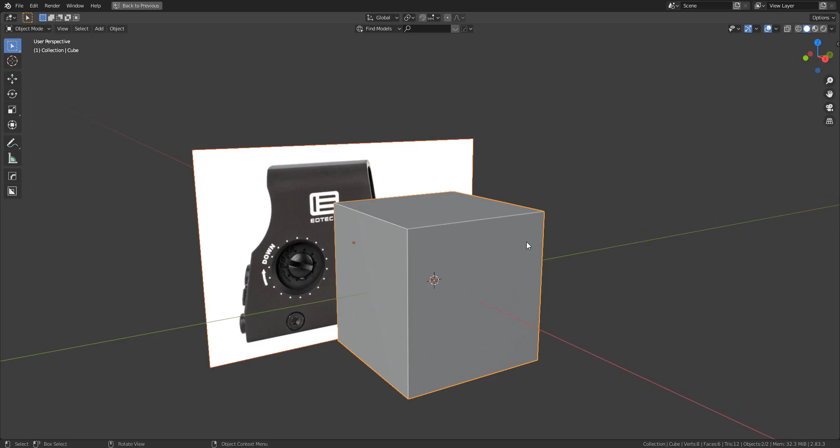I've already got a reference pulled up here, and we're going to get straight into it. We'll give this default cube a new home and get started on the model, using Boxcutter and Hard Ops today, since those are the best tools to use and it's something simple to add to future weapon designs or past projects. We'll get on with it and start with a cylinder here.

Now this sight we're modeling, the Eotech sight, I've had experience with before, and I really like using Eotech sights on my firearms. I can't recommend them any more than I already am, but I highly recommend using those if people have the available funds, because these sights are rather expensive, but it's well worth it. They retain zero, they're like tanks, it's hard to break them.

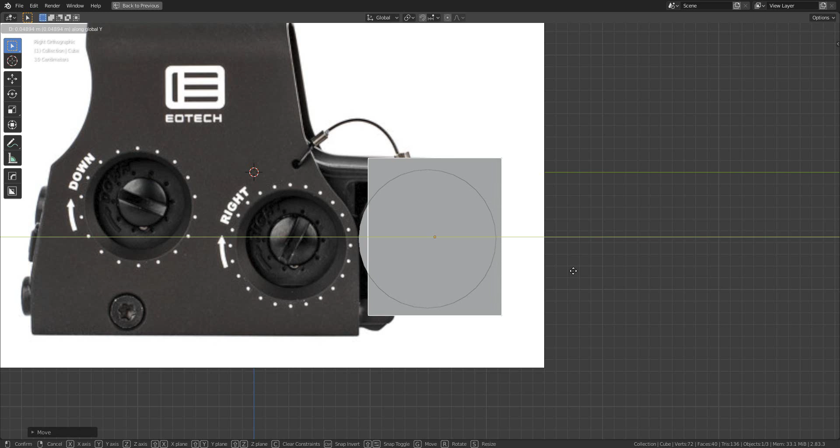So what we're doing here is building the outside curved shell for the battery housing. This particular model, I believe, takes a CR123A battery, a common military/law enforcement style battery. We're going to bring that here, and it kind of curves up on the inside. This outside shell is just like a metal protecting frame; on the inside it's made out of plastic and other parts, but it does curve up from the body here. We're going to try to replicate that now.

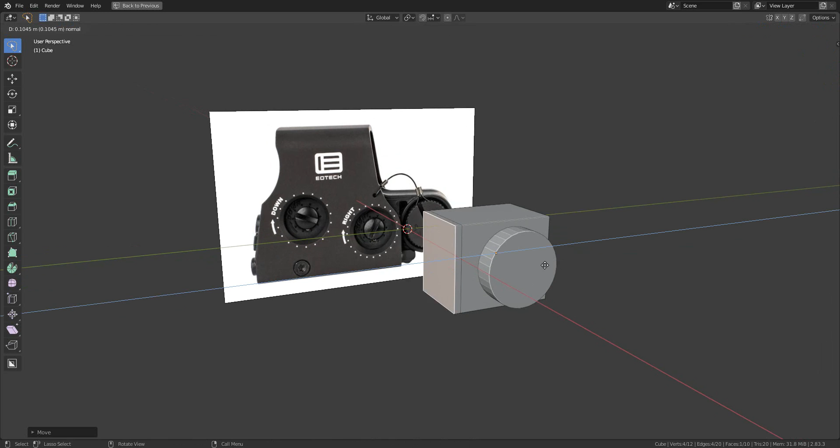I'm going to extrude that out, bring it to about where we need it on this side. Safe bet's about right here. And we're going to extrude that upwards to about right there, take our edge and move it. Same with this edge, it needs to be moved a little bit more over. And we can go ahead and get this beveled on - so we got a nice little bevel going here.

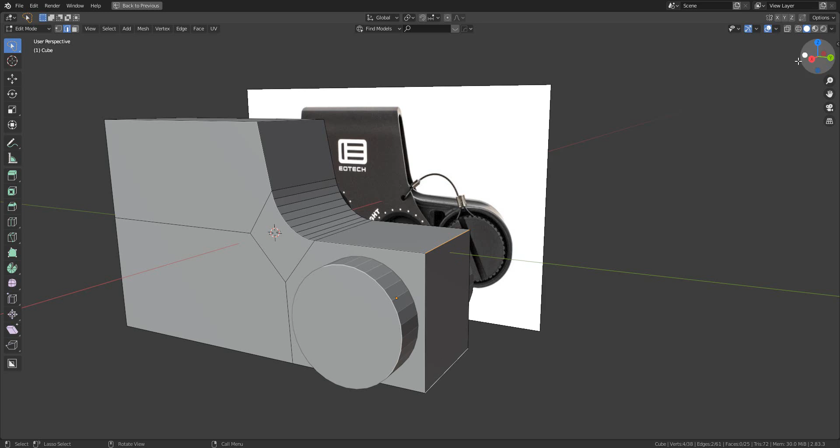Now what we're going to do is apply our scale, and bevel these edges here to try to match the profile of our cylinder. So now that's pretty well matched up, we're going to just stretch it out on the X a little bit, since it needs to be a little bit wider than what it was. Probably go with about right there.

So what we're going to do with this, we're going to C-sharpen it, bevel it, and we're going to union these two together with the Hard Ops union function. So that looks pretty good.

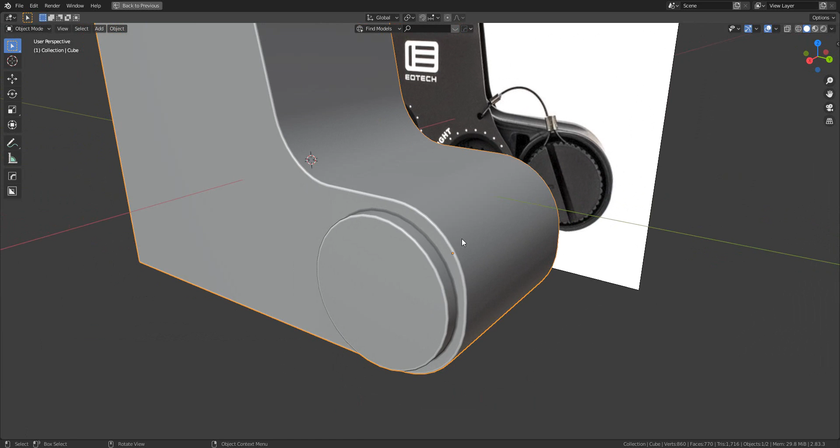I'm going to C-sharpen this again by holding Control when I click on Sharp after opening up the menu, and make sure it's looking pretty good, which in this case it is. Instead of that line supporting it, I'm going to give it this line to support it, and we'll remove that - that looks pretty good there.

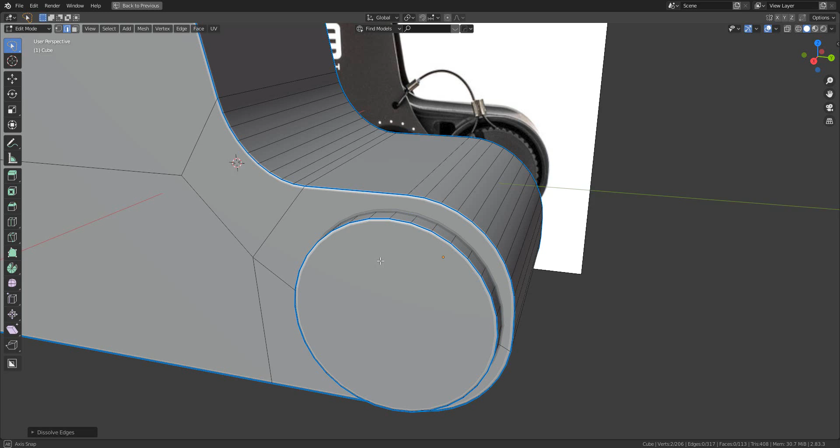We're going to take this edge here and this edge here - I promise I selected it - and we're going to bevel this. Go ahead and hit mark just to get rid of that, and grab this edge loop as well and make it a little bit smaller, on everything but the x-axis, so we don't have any overlapping bevels, because that's always not fun to deal with.

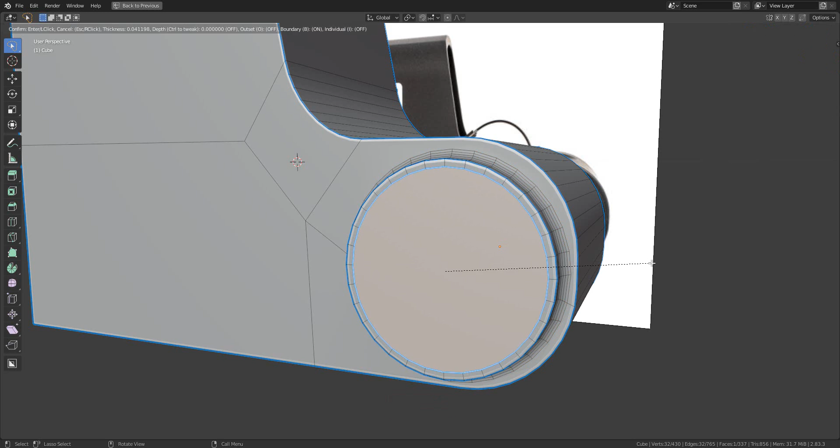So we got this basic shape going. Now we need to inset that, which is pretty easy to deal with. We're going to give it a mirror modifier, inset the face, and extrude it inwards. We'll revisit that for the battery cap here in just a moment.

Now the next step is to add a cutout after we bevel this top edge here. So we're going to go ahead and bevel that, make it look neat, nice and decent. Doesn't have to be anything crazy, we're just kind of eyeballing it right now - and that looks pretty good to me.

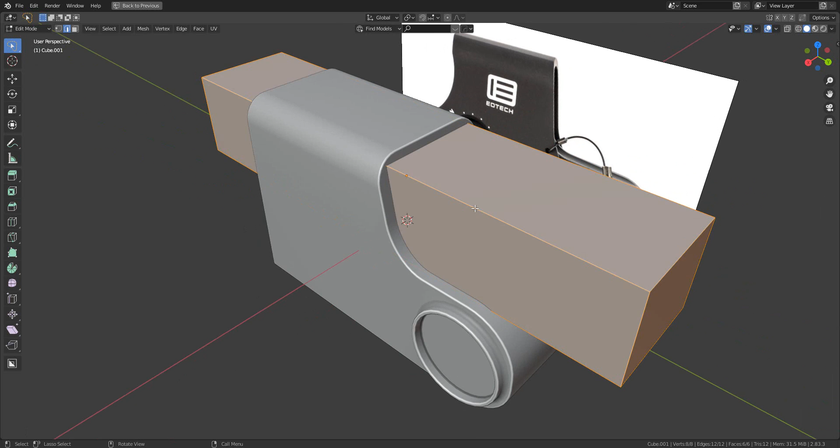So now, next step, we're going to get a cube, bring it like this, extrude it out, scale it up just to where there's a nice little gap on the top there, and extend it on the x-axis a little bit. Take all of our edges, apply the scale, and we're just going to bevel it to try to match the profile of the outside bevel.

We're going to go ahead and difference, and that's looking pretty good. Instead of doing that, what we can do is just bring this down a little bit here, difference, and that looks pretty good.

So we got a little bit of cleanup to do, which is no problem whatsoever. Just need to connect some lines here together, and we'll go ahead and move the outside bevel lines to the correct locations, and connect that there.

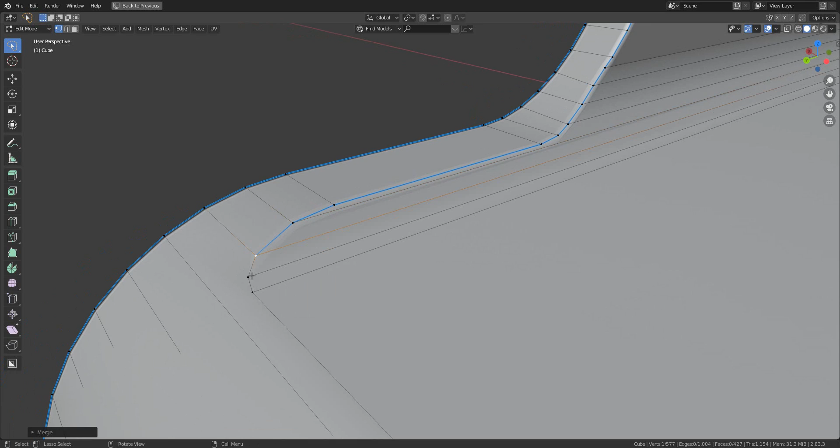Connect these here. And that's looking pretty good. It's about what we want it to look like. Now,

On the back side here, what we can do is we're going to try to get it to match the profile of this, because on the real ones they do match that profile. So first off, we're going to make sure our object is selected. We'll go into our orthographic view here.

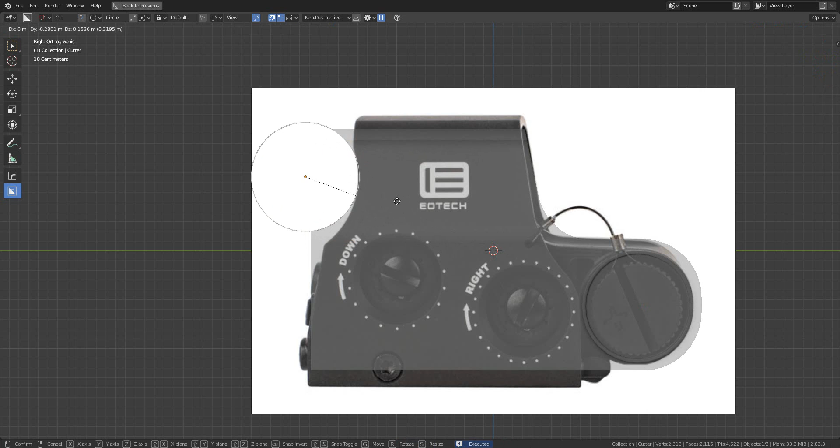Make sure I have Boxcutter selected, and we're going to go from view and do circle. We're just going to draw this circle in, punch it through, and we're going to move it in and manually adjust what this looks like. We're going to rotate that just a little bit, just to get it to kind of match that edge right there. So now that that's matching, we'll go ahead and hide that.

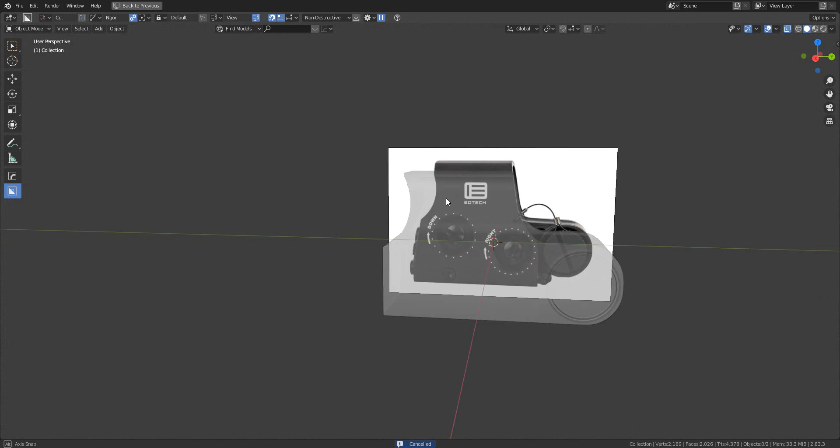We're going to choose our N-Gon tool. Make sure our object is selected again. Get our N-Gon tool. Chop off that edge. Chop off this edge here.

And we're looking good. We do have a few little issues here, but that's easy to fix, not a problem. Go ahead and join this line here. So it looks like we got a little bit of a situation here. We'll go ahead and turn our bevel off and see what we got going on, and it's just what I expected it to be. We'll go ahead and join that line there.

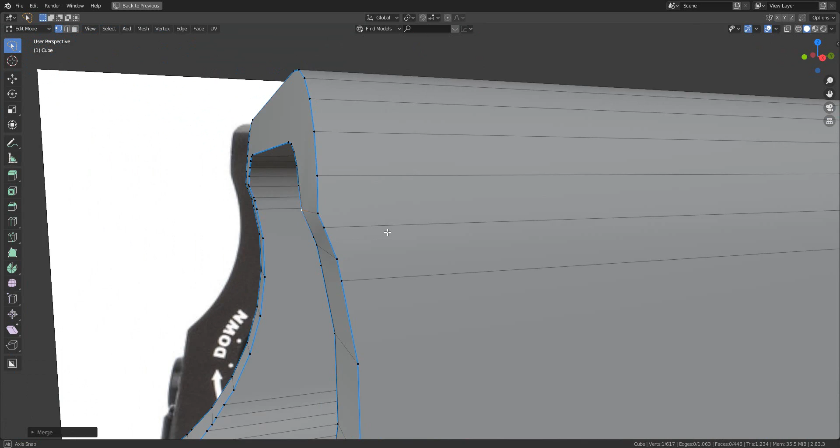Join this line here. And that's looking pretty good. What we can do here is I'm going to add an edge loop right there and just press J to join those together. And we will connect these. Move that up just a little bit.

And we're looking good so far. Make sure we're all nice and good looking over here. We don't want any issues. Connect that, and we're looking pretty good.

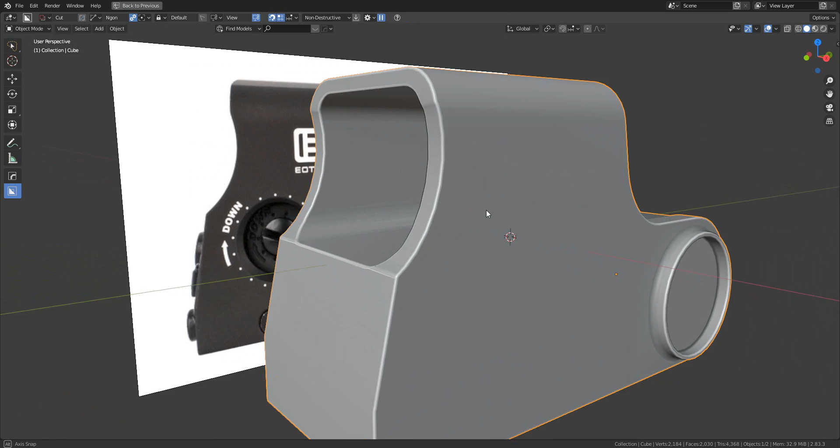So we'll go ahead and turn our bevel back on, and we'll see that it is looking good except for a little spot right here, and that's just where our bevel was being a little bit funky, but I double tap G to move that up a little bit, and we're looking pretty good.

So now that we've got this part added on, what we can do is add an edge loop right here, bevel that edge loop to where it gives us one more, and we're going to take these and pull them down. This is going to be the area that we're going to cut out for the sight to sit on the rail system.

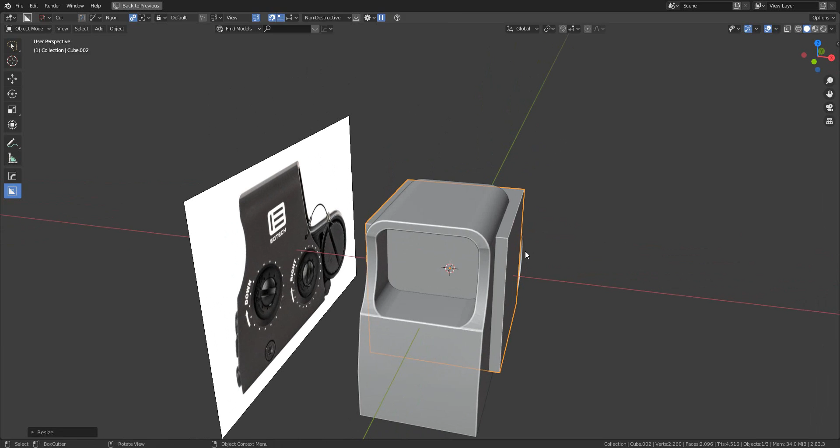So now that we've got that taken care of, we can add our outside shell. So what I like to do is just get a cube, get it about to the size we need it to be, down to there.

We're just going to do pretty much the same thing we did with the other one. We're going to apply the scale, take our two edges here, bevel it over just so it matches our profile on the inside. It doesn't have to be perfect.

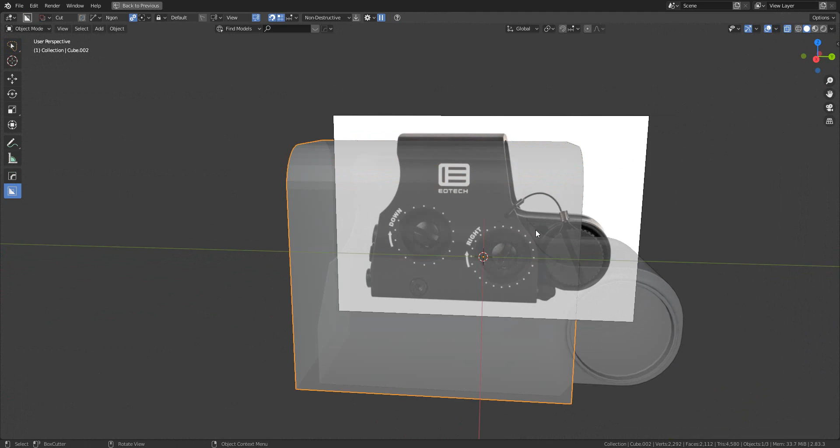It is a shell. We're going to go ahead and redo that bevel. I don't quite like how that looked. So that's much better. We're going to go with that one instead. So we've got our bevel for that.

I'm going to go ahead and C-sharpen it and bevel. I always get in the habit of C-sharpening even though it doesn't need it. You can just get away with sharpening it, but I get in the habit with C-sharpen because, like I've said in previous videos, I do stuff in a non-destructive/destructive type workflow where I get it the way I want it to be with the booleans, and then I make it permanent.

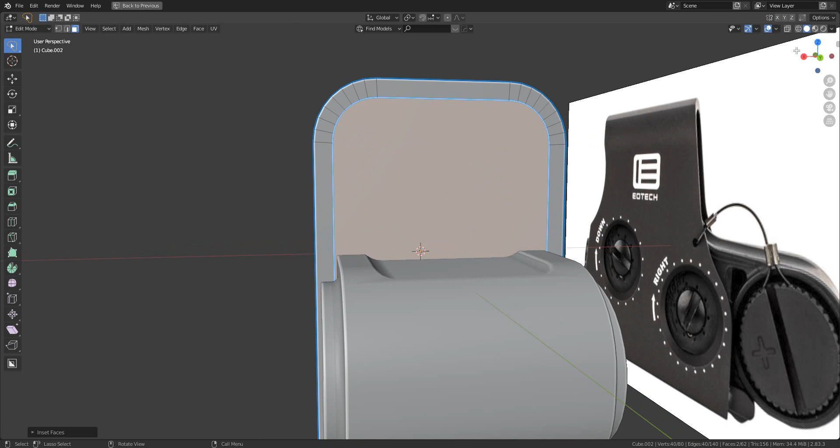So now that we have our shell selected, what we're going to do is we are going to bring our face down just a little bit. We're going to grab this face and that face, and we're going to inset it just so it matches the profile here. And so that wasn't a good inset, and we'll go ahead and do that again.

Go ahead and inset the faces just so we have a nice little shell. I'm going to scale it in just a little bit, and that's looking good. Now with the Loop Tools add-on, I'm going to go ahead and press Bridge, and that made that nice and hollow, which is exactly what we want.

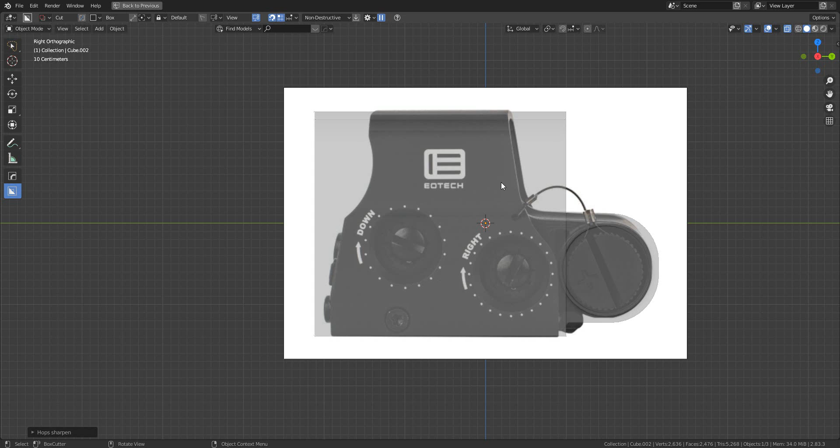Now what we're going to do, go ahead and select Box, drag it, and just chop off the bottom part, making life simple here. Now we're going to C-sharp it, go in, if I can press the right buttons here.

We're going to do pretty much the same thing with circle. Draw a circle, send it through, scale it on the Z, and rotate it.

Scale it on the Z a bit more, just so we're matching up nicely. In this case we are. We'll go ahead and hide that. Make sure this is selected again.

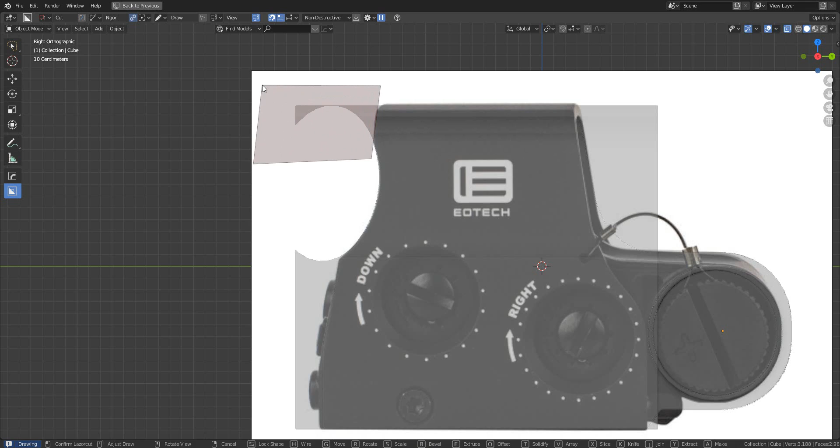Get our n-gon here. Chop that off, which wanted to be a bit goofy, so we're going to do that again. Chop this off. We're going to hold shift to keep it live just so we can see what's going on here. I'm not entirely sure what is going on here.

I see, so we're going to extend that out. This isn't working for whatever reason. It's because I'm chopping the wrong one. So we're going to go ahead and redo that.

Make sure our outside protector is selected. Go back into X-ray mode, and we're just going to attempt to do that again and pretend the last thing did not happen. So that's good.

Make sure our shell is selected again. Go ahead and draw an n-gon just to try to get us to match as much as we can here. Chop that off, and we're going to do the same for this here.

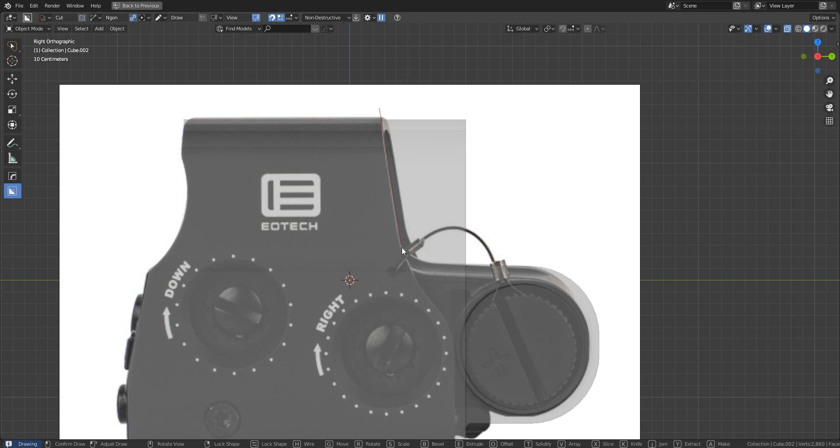Now this does start to get a slight curve, and that's perfectly fine. We're just going to follow that all the way down and out. Send that through there.

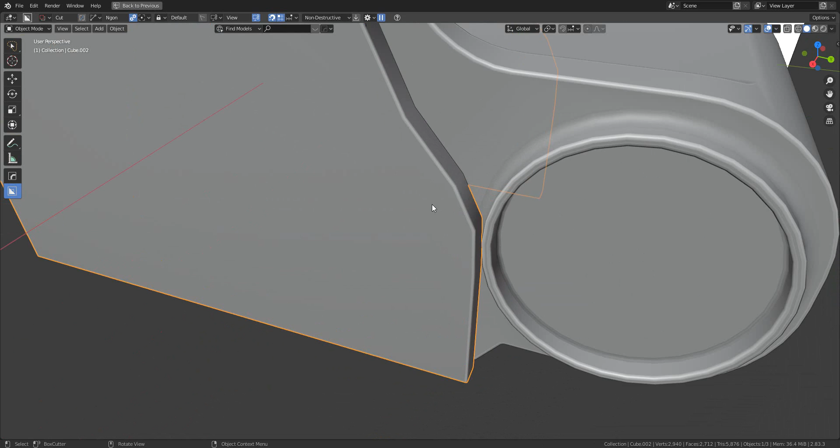Now, a cool thing is we can do this multiple different ways. We can C-sharpen it and go in and adjust those bevels manually, or the neat function we can do is go in here, get our last cutter, unhide it, and go into edit mode with our cutter.

Go ahead and grab those lines and bevel them inside the cutter itself. Same with these here. Go ahead and bevel those, hide it, and now we're looking really good.

This is starting to look like a regular sight, which is exactly what we want. So now I'm just going through looking at the topology here.

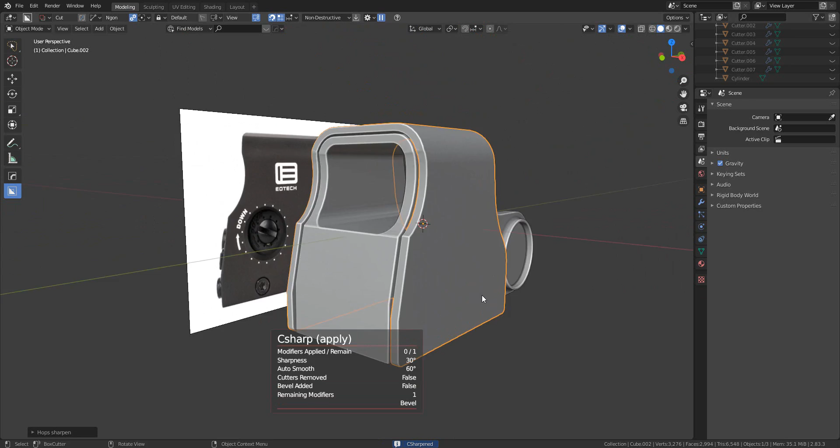I do want to take a little bit of creative liberty and bevel these edges here. I don't like how sharp those are, so we'll go ahead and add those, mark those edges, sharpen it again, and we're looking really good.

We've got kind of a sight system going on here. So now the next step is to get these holes cut out for our elevation and windage adjustment. These screws, you would screw them and it would move the reticle inside the dot to adjust for your elevation and your windage, just to zero in your weapon to make it shoot more accurately. So that's what we're going to do here now. Pretty simple.

Go into X-ray, make sure the outside shell is selected. Going to select circle, draw it to about the size it needs to be. Going to keep it live and move it into its final position here.

Since it's still live, what we're going to do is apply the weld modifier, add an array, offset the array to about right there. Now we're going to rotate it and offset it just a little bit more.

Perfect. And now if you'll notice on our picture here, it's kind of got a backwards bevel, which is fine, easy to fix, or easy to do rather.

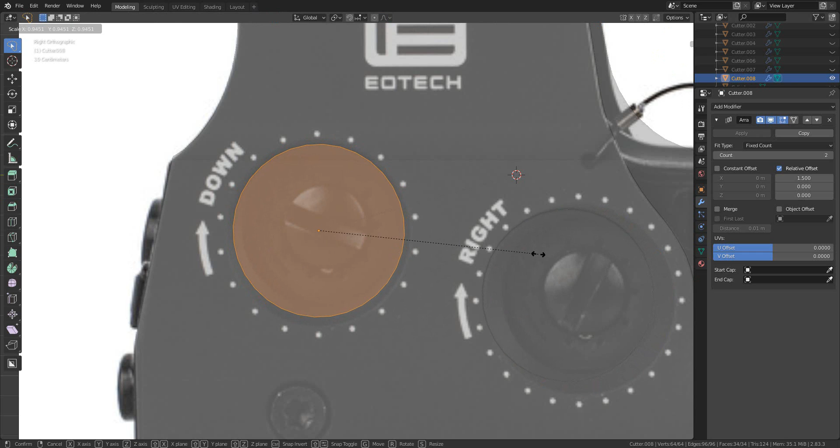So what we're going to do is move this just a little bit back to where it's supposed to be. Go into edit mode, select all, and just scale it down, and adjust our array modifier. So now that that's adjusted, what we can do, I know there's a million other ways to do this.

We're going to bring an edge loop to about right here. We're going to grab the outside edge loop and just scale it up a little bit. Before we do that, I'm going to go ahead and apply the array modifier, and we're going to do individual origins and just scale it up. And you can see what we're looking like here.

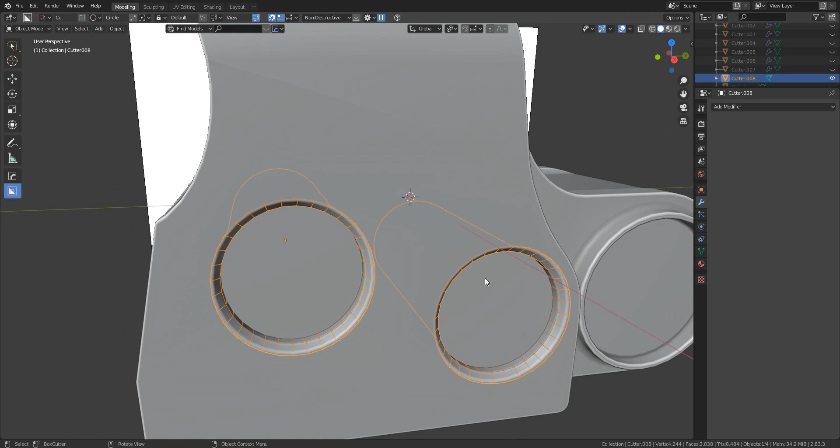So that looks pretty good to me. What we can do is go ahead and scale those up just a little bit more. Perfect. And we'll go ahead and hide that.

And we don't want this mirrored on the other side, because on the other side, that side is blank. There's really nothing there except for like a screw to go into mount onto the weapon. So we don't have to worry about that right now.

What we're going to do is bring our last cutter back. I'm going to snap cursor to selected. I'll hide that. Add in a cylinder.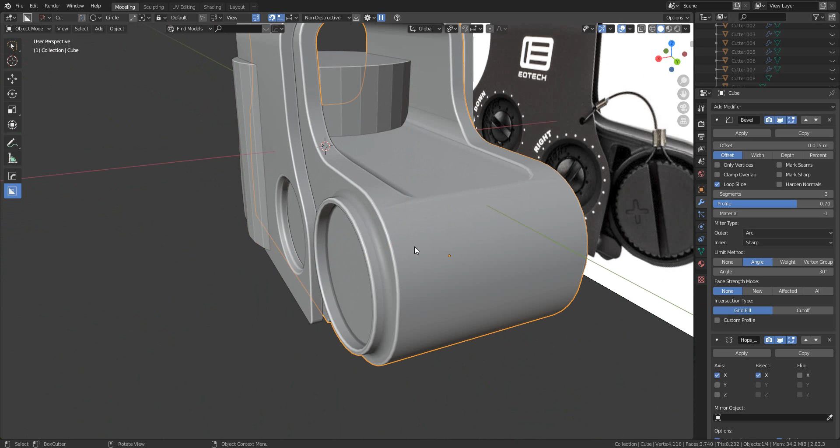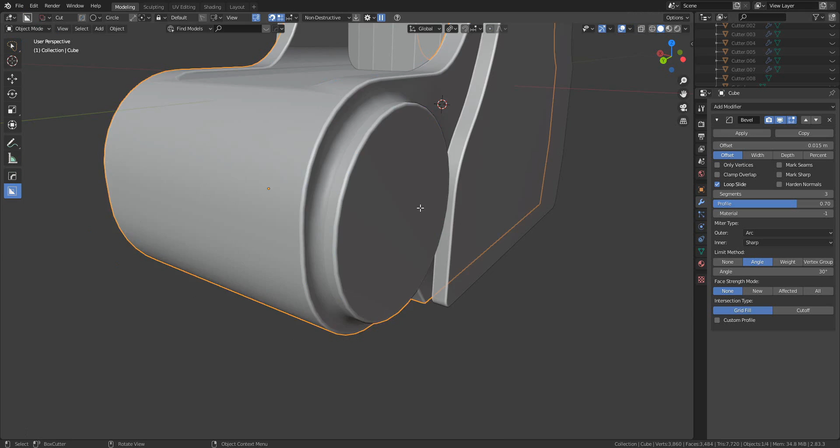What we're going to do with this is go ahead and apply our mirror here. And I'm going to bring this face, select the rest of it, delete it, select that edge, fill it in, and we're going to dissolve that edge because it's only a cap on one side.

Alright, going back to this, rotate on the Y, bring it over, just so we can kind of see what we're doing here. And the reference is off from my model just a little bit, but we're using this more as somewhat of a guide instead of an exact representation of the model itself. So we'll go ahead and do that.

Add an array modifier. Rotate it just about where we need it to be. And we're going to difference that, and that's where our screws are going to go into in just a moment.

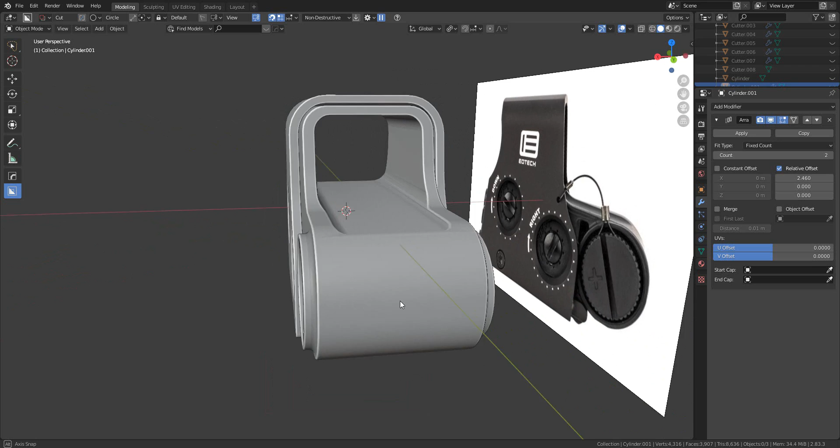Very cool, we're looking good so far. So now we're going to pay a little bit of attention on this side. There is a little plate that goes here. You're going to have your brightness adjustment and your power button on that as well. So we'll go ahead and start getting to modeling that plate.

So what I'm going to do is add a cube, scale it on the Y, bring it out just like so, bring it down right to the bottom, scale it on the X, and we'll go ahead and take this front face here. It's a little bit too thick, bring it in there, and we're going to extrude this all the way up till about right here, and push it forward to where it kind of matches the rest of the profile. It does have like a slight curve here.

So now that we've got that curve there, what we're going to do is add a loop cut in the middle. We're going to bevel that loop. I'm going to take these two loops here, bevel it again, and just take this face and push it down and over. That was too far down. We're going to push it down again and out. And instead of doing that, we're going to go ahead and go with good old-fashioned BoxCutter or HardOps.

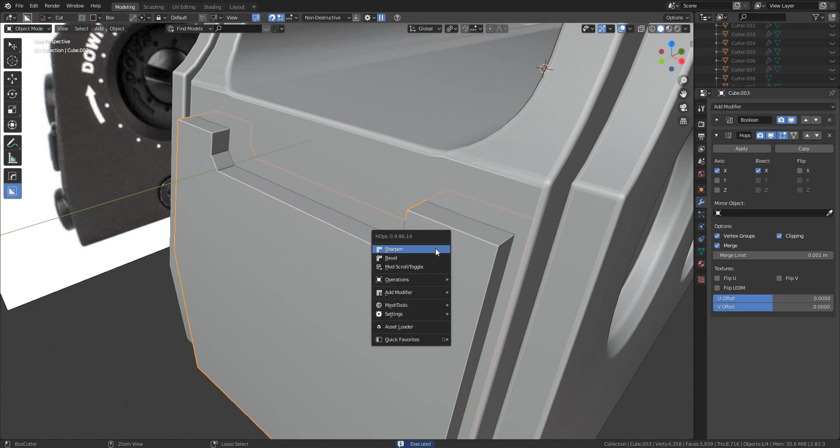Go in here with a box, draw it in. It's an ever so slight little cut, and that looks pretty good to me. So now we're going to sharpen this, bevel it, and we're going to take our top edges here and bevel those over. Mark it, and we're looking pretty good.

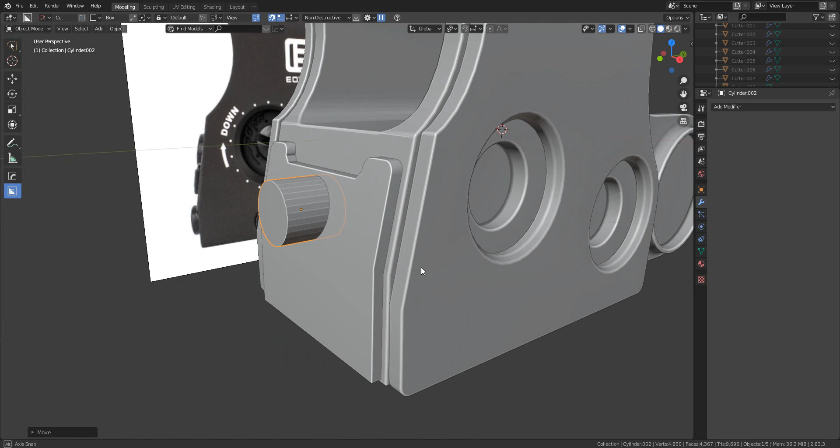So now that we've got that set up, the next step is what we can do is add our power button. And the cool thing about these sights, which is going to be fun to do here, is they have little raised protectors for the button, if you will. I don't know the exact name of what they would be called, but they're little protection type thing, like little raised edges where the button holes would be. So we're going to leave that there.

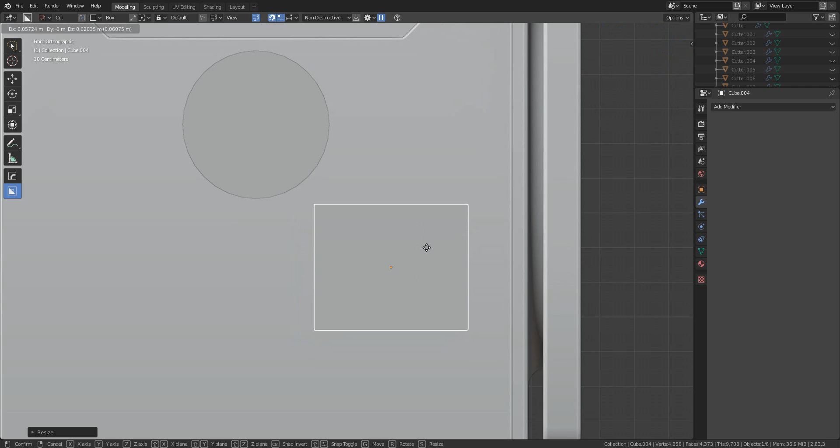Going to add a cube, bring that on the Y, just kind of get this to where we need it to be. These are kind of rectangular, and they will be about right here. Gives us some room for our screws and our cutouts on the bottom. So we're going to do that. Move that there. Make sure we have enough room and it's going through on both sides of our little plate here.

What I'm going to do is take these edges after I apply the scale, bevel them just enough. We're going to take these two and join them together, hold shift and click onto our plate, and we are going to do the knife. Very cool, that works for me.

Go ahead and hide these, and we're going to look and see what we have here. So that looks good to me. We're going to hold shift and press H to where it hides everything but this. Going to take our face here and here, inset it,

and we're going to use the Loop Tools bridge function. Same with these faces here. We're going to inset it and use the Loop Tools bridge function.

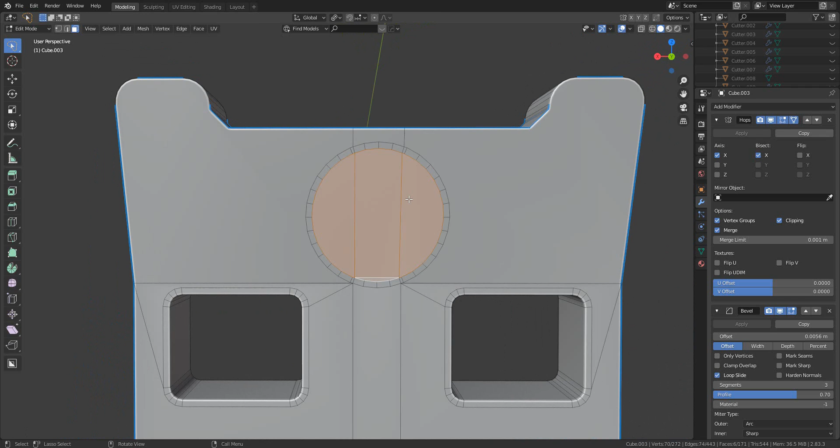So that gave us horrible geometry. We don't like that. We'll go ahead and apply our mirror and do that one more time. Sometimes mirror modifier will mess with some functions, and that's a lot better than our previous attempt.

So now what we're going to do is make sure our geometry is nice and happy looking here. We don't need any craziness going on, so what I'm going to do is just merge those two together. Do the same here, and we will do the same up here as well.

Looking good. We're going to go ahead and connect these two together by pressing J and get rid of these, which in turn allows me to get rid of this line, just to kind of clean up the topology a little bit. We don't want it looking disgusting. So that looks pretty nice.

Now what we can do is take this by holding Alt. We'll click on this edge right here, do the same for this, and the same for this. It didn't want to select all of that, and that's fine, so we will go in there and select it manually.

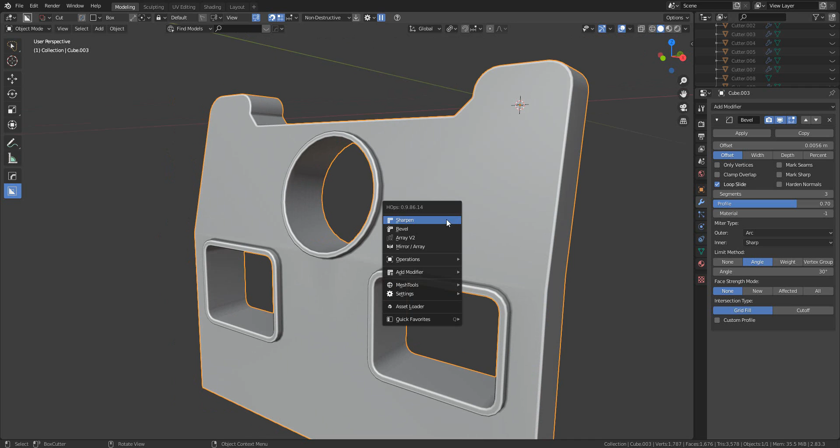Now what we're going to do is just extrude it outwards a little bit. Make sure it's still set on individual origins, because we want our circle here to be on the angle and not follow these angles here. So now that those are added, we'll go ahead and sharpen it and make sure our bevel's still looking good, which in this case our bevel is looking pretty good.

So we'll go ahead and press Alt H, unhide everything, go over here and hide the cutters again because we don't need those. Now we're looking pretty good.

So what we can do now is we will add a cylinder again, rotate it on the X, bring it straight down on the Z, make it about the right size, want it just ever so slightly smaller than the circle we just cut out, and we're going to bring it on through.

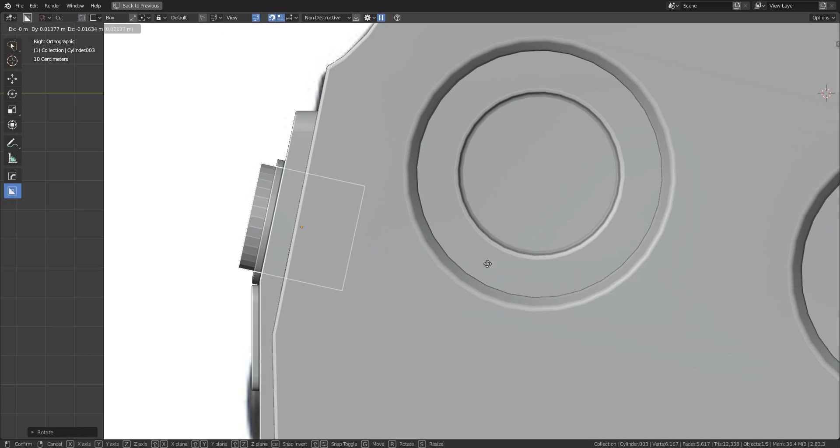With this one, we will rotate it to match our little angle we have here, just to put it in, make it look pretty nice. That looks pretty good to me, so we're going to move this back just a little bit, take our face and bevel it over. Slap it with a shade smooth, and we're cooking.

And what I'm going to do here is I'm going to go ahead and mirror modifier it again. I'm going to take this edge loop, duplicate it, make it its own selection, press A, extrude it along the Y. We're going to take this face, fill it, take that face and fill it, and we're going to select all and Shift N to recalculate the normals. We'll go ahead and shade smooth, and we're looking pretty good.

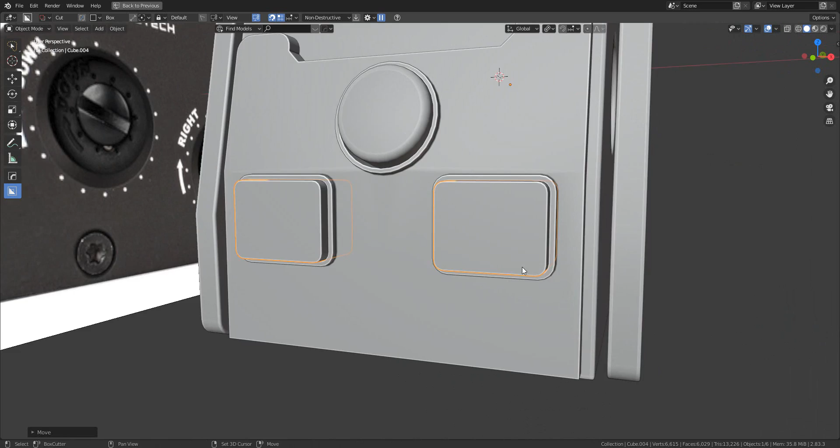So we'll go ahead and put those back where they belong. And we're going to take this face here and just bevel it over as well. Make sure to get off the sharp marks. So now we have our buttons in the back, and we're looking pretty good so far.

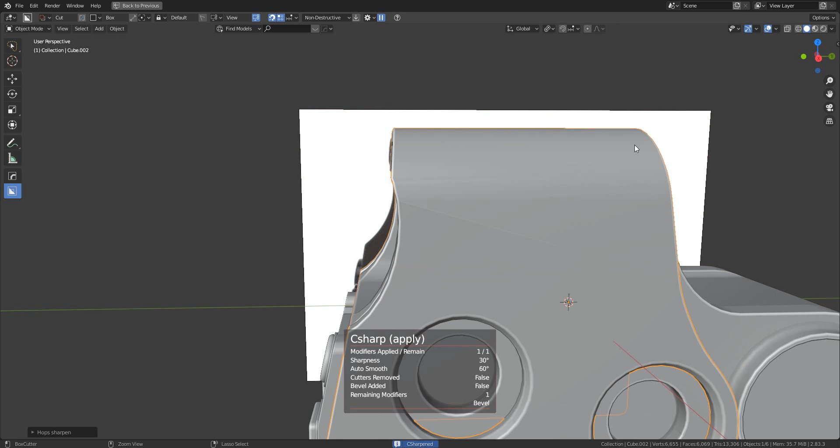Go ahead and handle our issues here, which that little line is the problem child. Go ahead and merge that, and it's doing the same thing on the other side, so we'll go ahead and fix it on the other side since we no longer have our mirror enabled. So now we're looking pretty good. We do have this little artifact here, but we can fix that relatively easily here in just a moment.

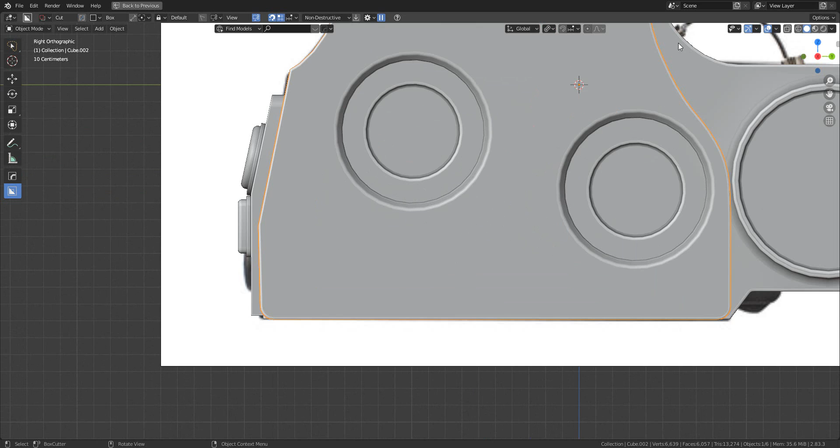So we're looking good. Now what we need to do is we're going to go ahead and put this screw in here, and it's going to go directly through onto the other side as well, and then on the other side there's going to be a bigger hand twist screw slash knob to where you can use your fingers or a pair of pliers to crank it down on that rail system. So we're going to make sure our outside shell is selected.

Go into X-ray mode, select circle, pick about the middle if we can, hold shift, send it through, and we're just going to move it down just a little bit. And we're looking pretty good so far. Inside there is where a screw will be going.

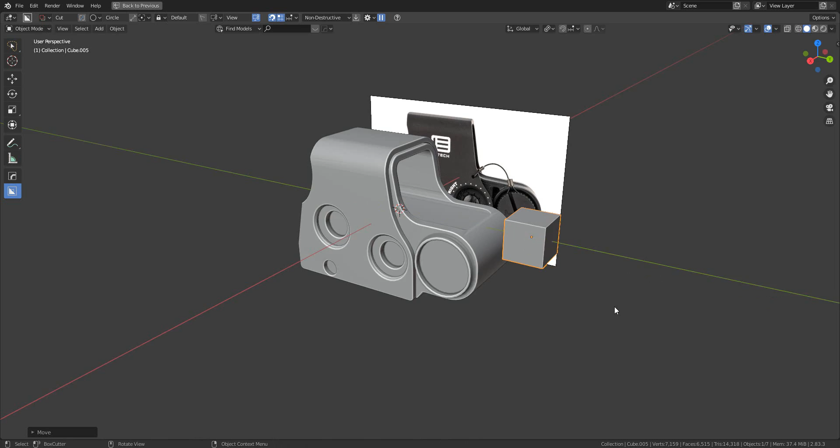So now we need to get our profile for the rail, and that will be pretty easy to do. So we'll go ahead and add a cube, bring it over, you want it just about there. You can be very precise with the measurements to make sure it fits onto a regular Picatinny rail system that most firearms either have or can have aftermarket accessories for. But I'm just going to eyeball it here because I kind of know about the right size. And the cool thing is we can always adjust the size of it later if we leave this active, or we can just go in and manually grab it and scale it if we need to.

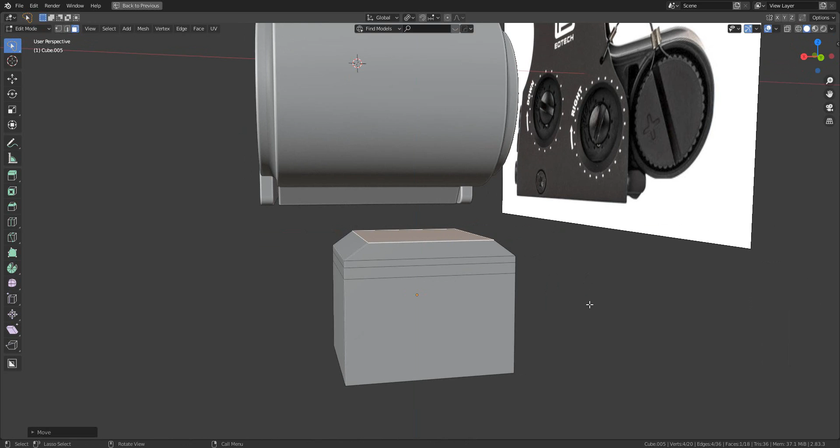So now what we're going to do, we're going to add a loop here, add a loop right underneath that, and add a loop right underneath that. We're going to take this top face here, scale it in on the x-axis, bring it down. I'm going to take this edge loop here, scale it in on the x-axis. Actually, we'll take the bottom one as well. Just so we have our little Picatinny rail type look going on here. So now that we have that taken care of, we will go ahead and extend it out on the Y.

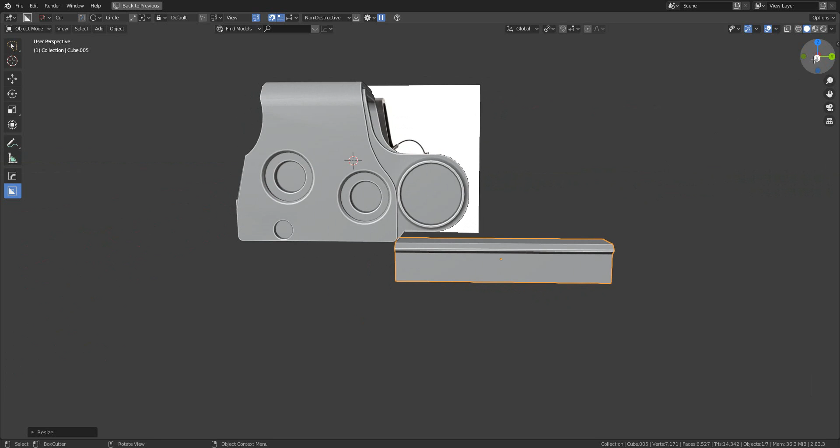And we'll go ahead and move it up into the weapon about like that. You want to have a little bit of meat grabbing onto the rail. So once that is in there, we'll go ahead and move it over. Make sure it goes all the way through. We're going to duplicate this.

So Shift D, go ahead and hit, just click. We'll go ahead and difference that. And we'll go ahead and difference the bottom piece. So that's looking pretty good. Go ahead and scale that just a little bit more.

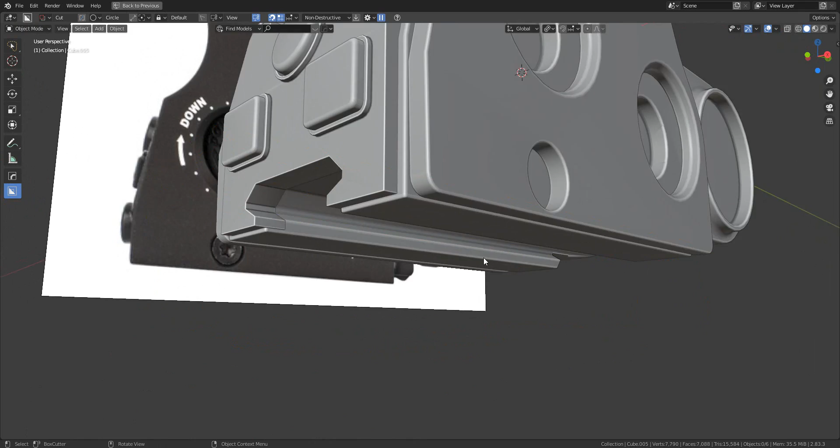Hide it. And we're looking really good here. So now what we can do is we can go ahead and C-sharpen it and see why our bevel is giving us a hard time here. And also clean up some of this junk down here.

So what we can do is go ahead and hide our bevel modifier so we can work with it a little bit better. I'm going to draw a knife cut to that there. Go ahead and move that up. Give us some more room to work with. And we'll do the same on the other side here.

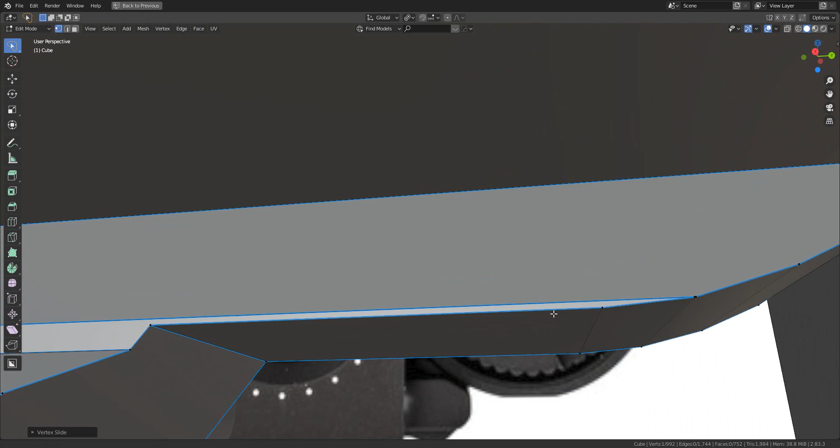Give us some more room, and we will merge those two together. Make sure it's not doing the same thing on this side here, which it happens to be doing that. So we'll go ahead and merge those together as well. And we will check back on this side. I'm just pressing period to jump over here so I don't have to move my mouse all over the place all day long. We're looking pretty good.

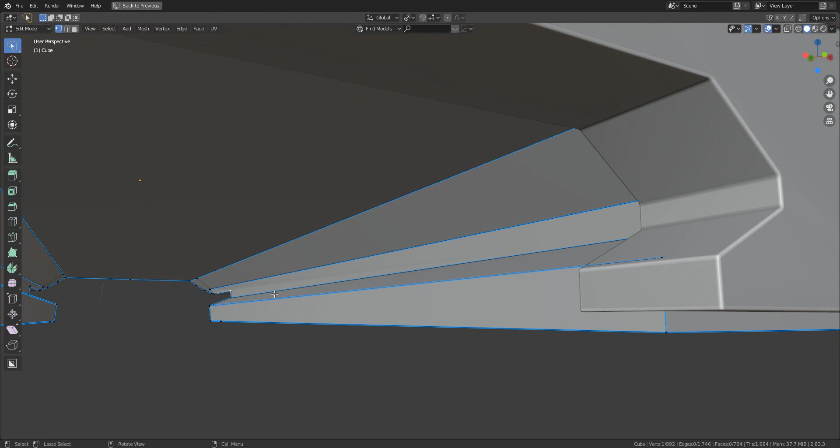No bevel overlap. We'll go ahead and take this bottom edge here on both sides and just push it down just to give that bevel a little bit more room to work with. And it looks like we got a little issue over here. This is looking good. I always like to check my knife just to make sure it actually went into the mesh properly, which in this case it looks like it has.

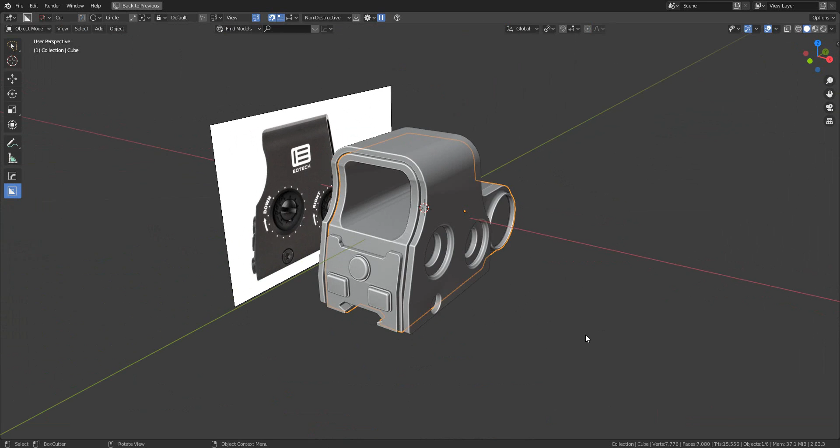So what we can do now is go ahead and turn our bevel back on. Bevel's still not too terribly happy, but we can deal with it. Doing that literally does nothing. But we're looking pretty good. What we can do is also just get rid of our bevel just a little bit, just take back a little bit what we gave it, because we're giving it too much and it's getting a little bit excited on us now, and we can't be having all that.

Now with this here, what we're going to do is just bevel over these edges here, mark them, and C-sharpen that. So now we're looking pretty good.

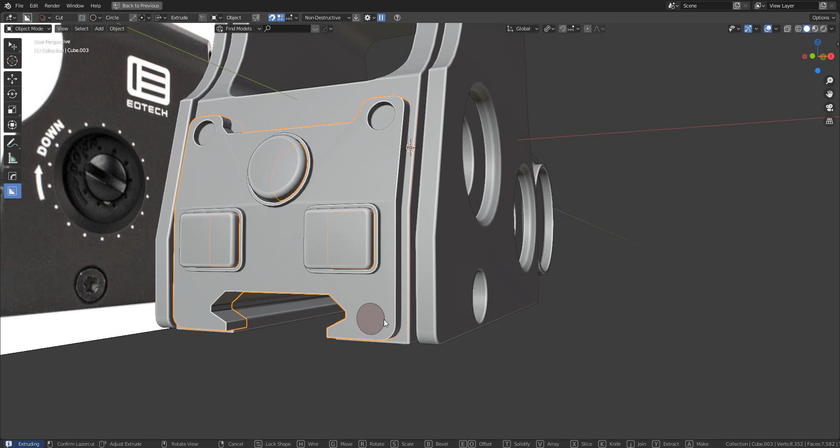We're going to make sure our mirror is still active, which it happens to be. I'll move it up there above the bevel. We're going to go with object this time, and we're going to draw a screw hole here and a screw hole right here. Just kind of eyeballing the shape. You don't have to be extremely precise.

So I'll go ahead and sharpen that. And we're going to go through and figure out why this is wanting to give us a little bit of issues. So we're just going to jump off a line there, jump a line there, and that fixed our issue. So we're looking pretty good so far.

Now what we can do is add our battery cap, and we'll go ahead and do that. I also want to go ahead and add this little hole for our retention wire here. I'll go ahead and send that through. It doesn't need to be through on both sides.

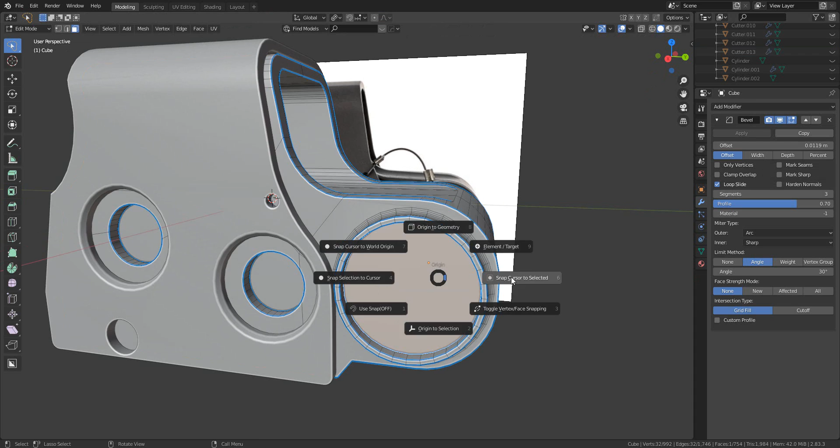I forgot to keep it live or just draw it normally, so I'm going to go ahead and pick that cutter back up and move it over. It got a little bit ahead of itself and too excited. So now what we're going to do is grab this face, snap cursor to selected.

Alright, now we're going to do our little battery cap here. So what I'm going to do is add a cylinder, change the verts up to 66, scale it down, rotate it on the Y, scale it in on the X, bring it over here. Looking pretty good so far.

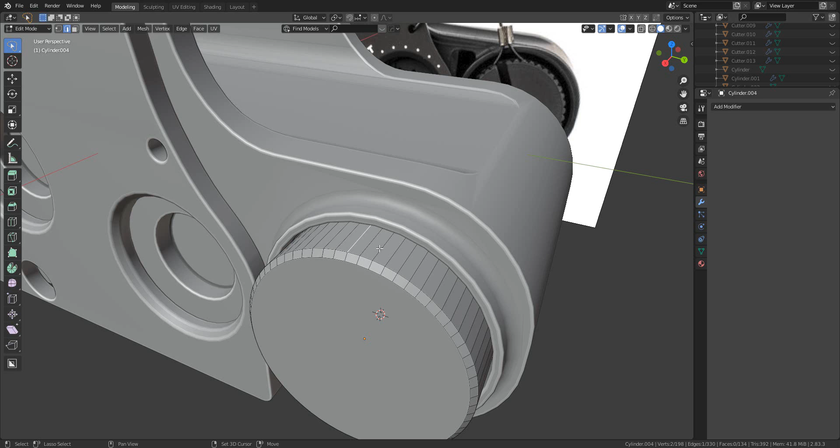Next step would be to bevel this edge after I apply the scale. It's got just a nice little chamfer going, nothing crazy. Very good. So now what we're going to do is select every other line. And this will take a minute, so I'll go ahead and speed it up.

Alright, cool. Now that we've got those lines selected, we'll go ahead and scale it on everything but the X, holding Shift and hitting X. Scale that inwards.

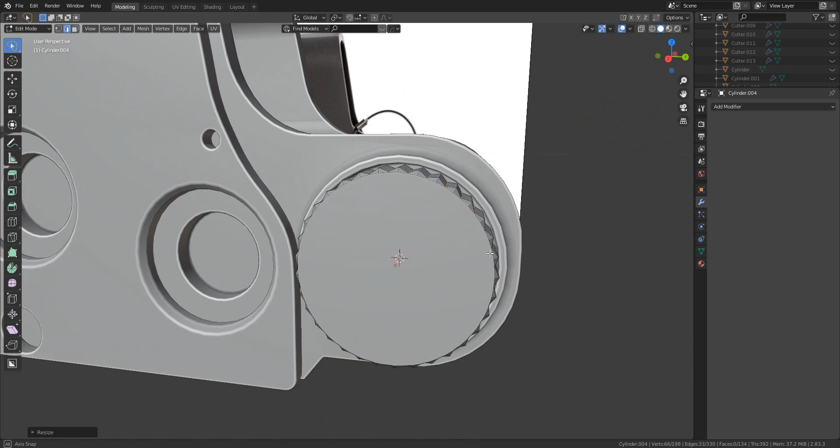That's looking pretty good to me. So we'll go ahead and look at it from this point of view here and scale it on everything but the X, so Shift X again, just so it's right there. We're looking pretty good, so I'll go ahead and sharpen that and put a nice little bevel on it.

So now we're cooking. I'll go ahead and scale this in just a little bit more here. Now we need to add our cut across, so that's going to be really simple. Go ahead and do a cube.

Bring it in, scale it up, scale it out. Probably in on the Y just a little bit more. Bring it over to about right here. And we're going to just take a look at it. I'm going to move this over just a bit.

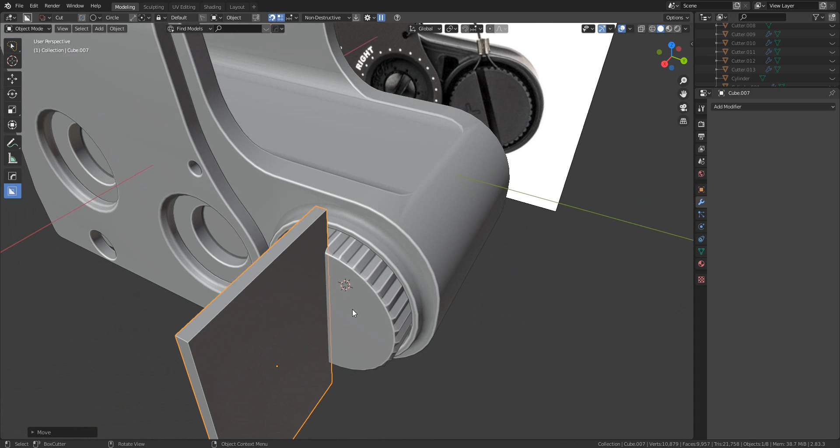And difference it. So I'll go ahead and scale that out just a little bit more. Bring it over some. Go ahead and press H. Scale that out just a little bit more, get past our bevel.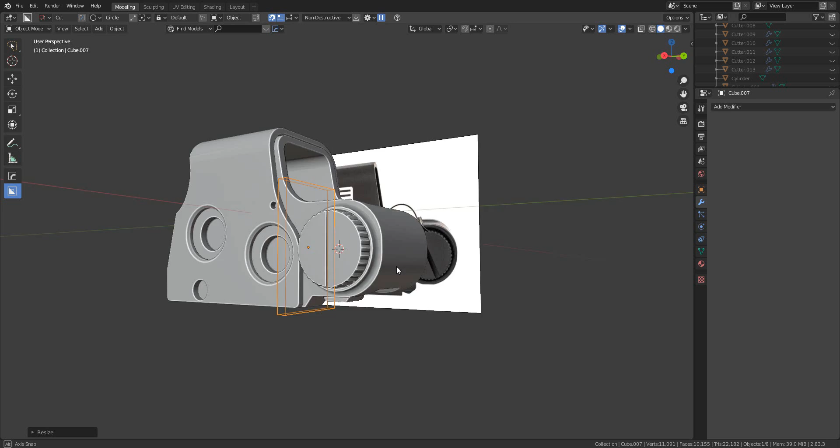And it's a pretty deep line as well, so we're going to go ahead and push it in on the X a little bit more. We're looking pretty good. We'll go ahead and sharpen that. That's looking pretty good so far.

Now what we need to do is add our little retainer cable, so we'll go ahead and do that. One thing I did notice about this here is we need to move this outwards just a little bit. Take this face back here, push it this way.

We'll go ahead and snap the cursor to selected, add a cylinder to it, and before we do anything we'll go ahead and turn this back down to 32. Rotate it on the Y 90 degrees.

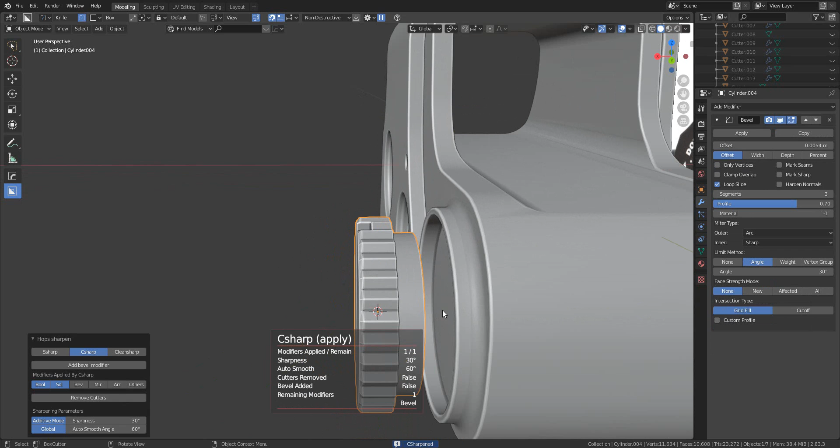Scale it on everything but the X-axis. And we'll go ahead and union that into there and go ahead and sharpen that. So now what we'll do is push this back in to about right here. That's looking pretty good.

And we'll get our little cable going. So there's a couple of easy ways we can do this, and we're going to do that. So first thing we'll do is add a circle. Go ahead and rotate it on the Y. Scale it in to where it's about like this.

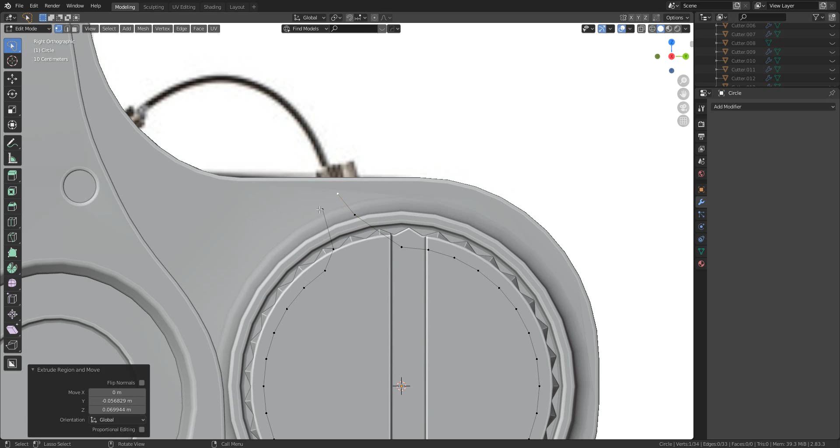And we're going to take this edge and rip it. We'll go ahead and bring that edge up there. Same with this one. Just so we can kind of get a little bit of progress here, make it look pretty decent.

So I'm going to take this vert here, extrude it out, extrude it out, extrude it out, and go back in. Looking pretty good. I'm going to go ahead and add in another circle in edit mode. Go ahead and scale that down.

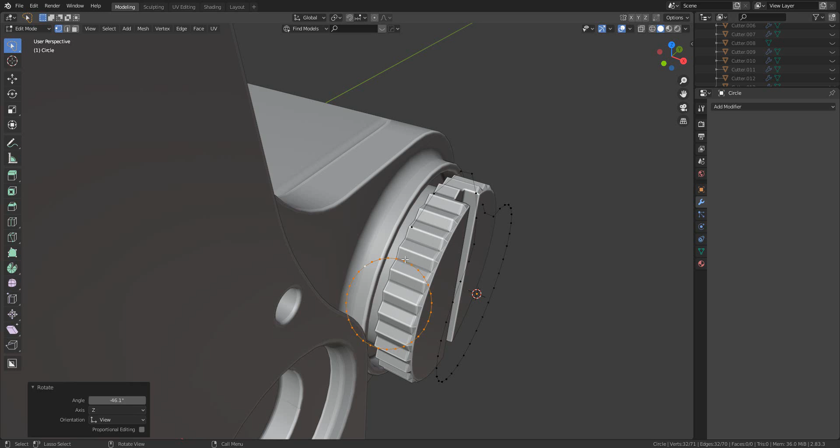We'll go ahead and get rid of these two vertices here. Select these. And we're going to go ahead and scale that up just a little bit. Rotate it. And we're going to get rid of these two vertices here, or vertex, rather.

Extrude it to where we match, and I'll go ahead and merge those at last. Extrude it, and that's looking pretty good like that.

So now what we can do is we can go ahead and just dissolve those, dissolve those, because we don't need as much here. I'll go ahead and dissolve every other one, because we don't need all that.

We'll go ahead and take all of that and scale it in on the X. So now we're looking pretty good. We'll go ahead and push this over. Take that bit there to about right here, and that's looking pretty good.

Now what we're going to do is we're going to go ahead and apply the scale and convert this into a curve. Go down to geometry and increase the bevel, just holding shift here.

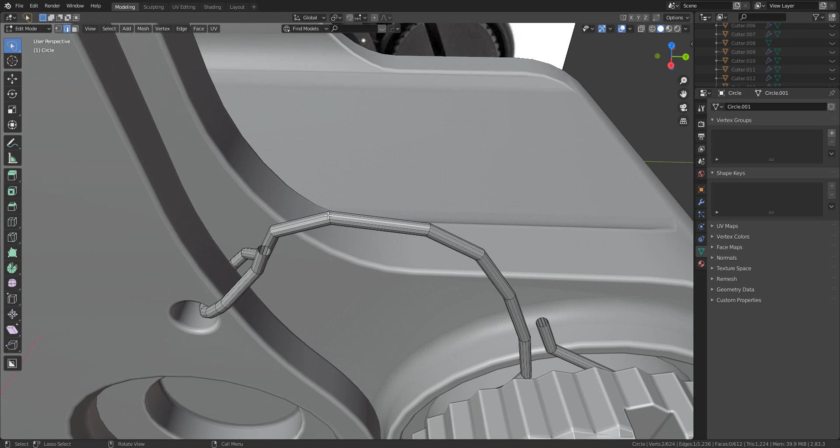So what I'm going to do is go ahead and convert to mesh. Now that that's converted to a mesh, we can go ahead and take these horrible looking edges here, we'll just go ahead and bevel those over so they look a little bit more like wire instead of goofy looking straws.

So that's looking pretty good. Make that the 24. Go ahead and scale that down. What we're going to do is just bring it up to right about the size we need it to be, not too crazy.

And we'll go ahead and scale it along its original Y and scale it in on the X just a little bit. We'll bring it over and meet it up with this here.

What we're going to do is take this edge, join it. We'll do the same with this edge and we'll join that as well. We'll go ahead and do the same for the two neighboring ones because we want everybody to be happy, and the same here.

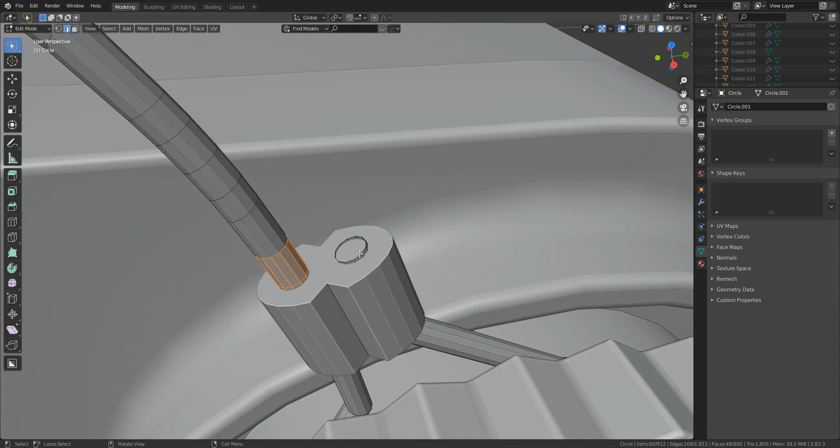Join those together and take this loop and just scale it in. So now that looks pretty good. We'll go ahead and take our cable here, bring it up just a little bit and fill that in. And we're going to duplicate this.

Rotate that over and do pretty much the same thing we did on the other side. That looks pretty good like that. Go ahead and scale this in on its original X just a little bit more to make it fit better. Which in this case it does not fit too terribly well.

We'll go ahead and rotate that on its original X-axis. Take this here, and just move it out, and fill that in as well. Go ahead and shade smooth our cable here. Just leave it at shade smooth. We'll join these two parts together and we will Csharp and bevel them.

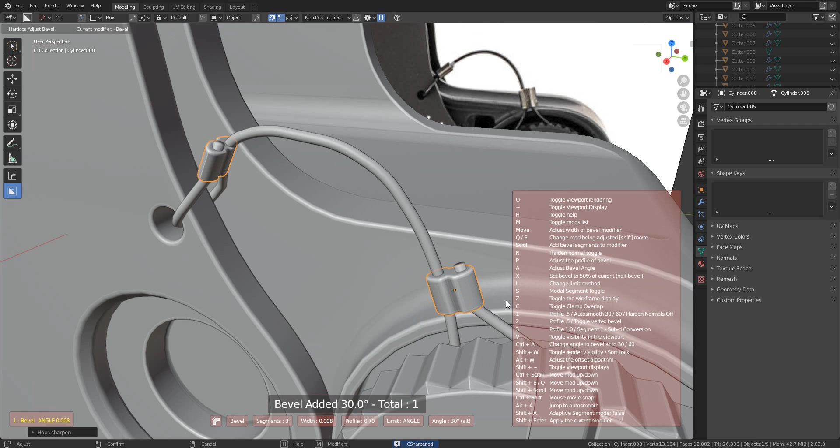So now we're looking pretty good like that. We got our wire there. So the next step is we're going to go ahead and get these screws added in, which will be pretty easy. We're going to go ahead and grab this face, snap cursor to selection rather. Go ahead and out of edit mode and get our cylinder.

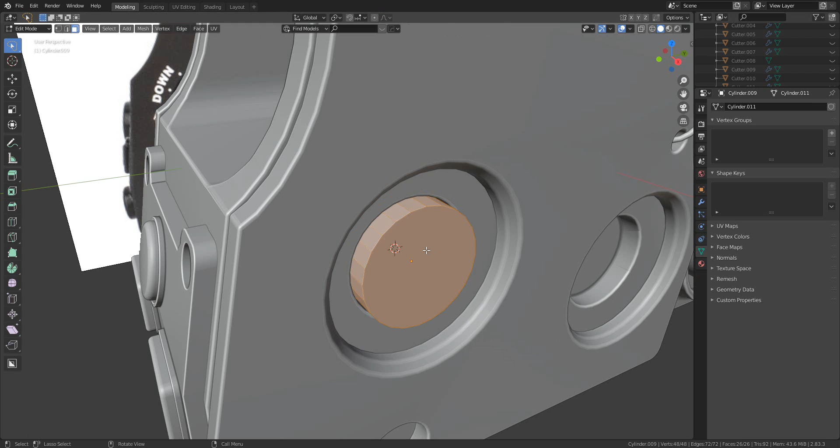We'll leave it at 24. Apply the scale. Bevel that over. Add a cube. Bring it out. Difference that. That's looking pretty good. We'll go ahead and send it like that.

Actually, instead we'll go ahead and pull that out just a little bit, give some room for our bevel to work here. And we're just going to put a nice quick little bevel on there, something simple. We'll go ahead and give it a random rotation as well to kind of match the picture up a little bit. We'll duplicate that over, rotate that, and now we got our screws in.

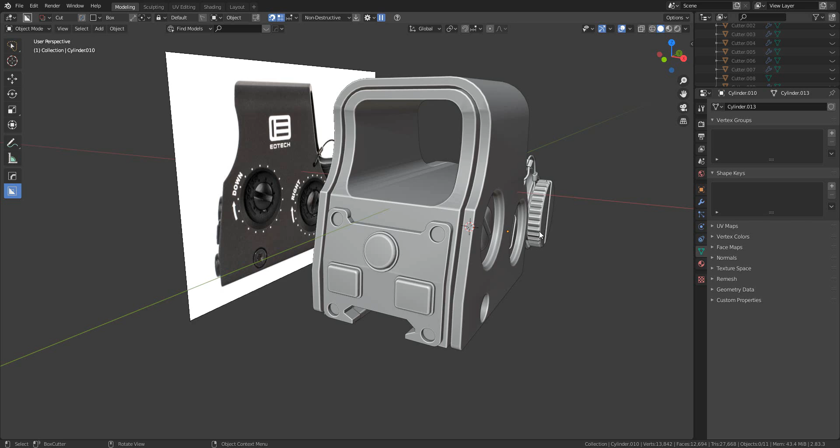So the next step would be is add our little hand crank screw there, and a little screw right there, and then our pieces here, and we are almost done.

So what I'm going to do is go ahead and add a cylinder. Go ahead and leave it as it is, it's a 24. We're going to move it out of the way. Snap cursor to selected. Go ahead and bring that down. Apply scale, bevel that over just a little bit. We don't want to go too crazy with it.

Get a cube here, bring it up. We're going to make that star screw there, and we'll go ahead and reuse that star screw in places here too. But I just realized that it's not a domed over head, so we'll go ahead and just get a regular cylinder, scale it down, apply our scale here.

Take our cube here and just delete it, because we're not going to be doing a flathead or a Phillips style screw. We're going to just go with that diamond there. So we're going to go ahead and add in a cylinder.

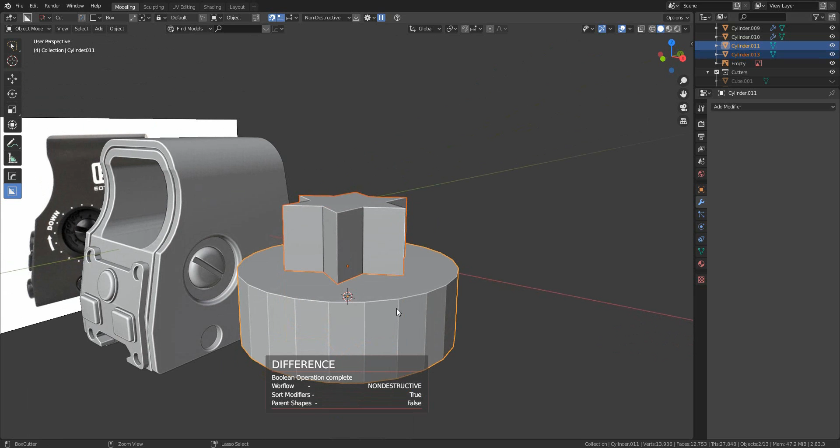That looks pretty good. We'll go ahead and difference that. Go ahead and difference that. Sharpen it, put a little bevel on it, just so it looks pretty good here. And we're going to go ahead and scale this down, rotate it on the Y, get it right to about where we need it.

Very cool. We're going to go ahead and push this over into where it needs to be. And we're going to duplicate it, rotate it on the Z -90. Go ahead and take this screw, put it here, duplicate it along the X here. We're going to go ahead and duplicate these, bring them up.

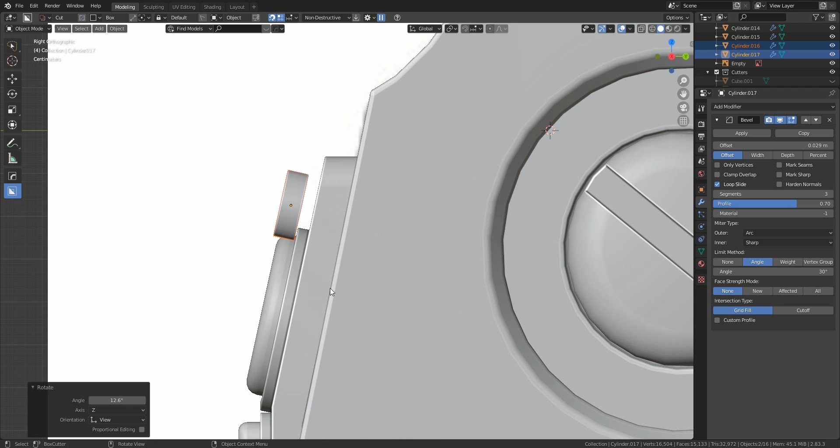Move them over to about where they need to be since they are on an angle. We'll go ahead and grab all of these, push them in on the Y. Take these two top ones, since they are on an angled bit, we'll go ahead and rotate them, push them in on the Y, and just down ever so slightly on the Z. So that looks pretty good.

Now what we need to do is we need to add our little hand knob here so we can crank it down onto our rail system. We'll go ahead and duplicate this, bring it over, go ahead and get rid of our reference, we don't need it anymore. We're going to go ahead and scale it up on the X, scale it down, rotate it 180 degrees, give it some random rotation, just so we can have it about where we want it to be, which is right there.

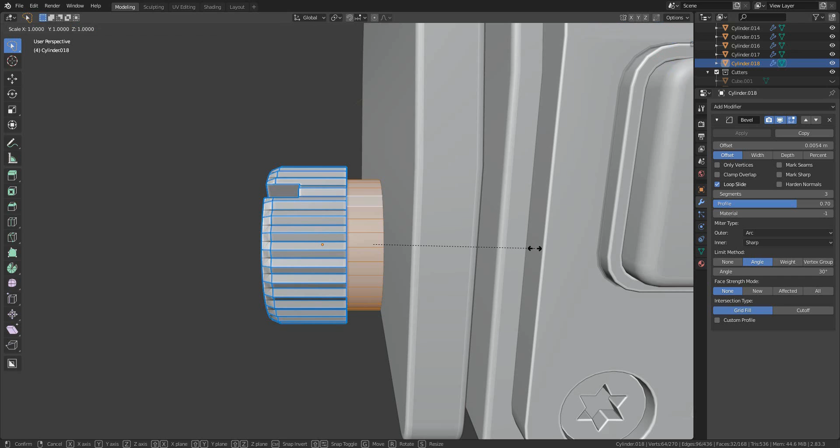Go ahead and make it a little bit bigger. We're going to take this whole edge loop here, scale it on everything but the X-axis, just so it gets inside of this hole.

And we're going to go ahead and push it through. And now we're in business. So now we have a really decent looking sight.

We're almost done. We're going to go ahead and snap the cursor to the world origin here, add in a cube, make it a little bit longer here. We're going to go ahead and difference that, push it down.

Go ahead and C-sharpen this. I'm going to bring this edge, move it forward just a little bit, take this face, inset it, extrude it upwards.

Take this, push it down, that one down just a little bit more, bevel it over with just a single chamfer. That looks pretty good to me.

Next step, what we need to do, I'm actually going to go ahead and push that down more, is we're going to add our screen in, or the glass. So we're going to add a cube.

Scale it on the X, bring it up, scale it on the Z, just so it's inside our little frame here.

I'm going to take the outside edges here, apply the scale, bevel those over, just so they're kind of out of our way.

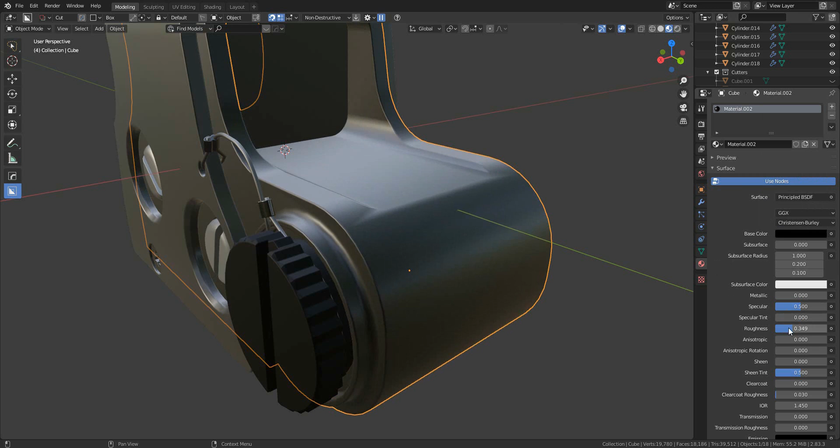And we'll take this one and turn off the metallic for it as well. Go ahead and make it black and turn the roughness up a little bit more.

This looks good, so we'll go ahead and take these two, join them together, and get rid of that material, and we'll go ahead and make these darker as well.

Same goes for our screws here. Go ahead and join those all together. Get rid of all but one material and make it a bit darker as well.

And just so we can kind of see what we're doing a little bit better, I'm going to go ahead and make these like a nice tannish color.

I'll just go ahead and go with it like that. Make this a little bit darker tan color. And that's looking pretty good to me.

So we go ahead and take our buttons here, join them together, because we don't need them to be multiple different colors, and we'll just do a new material, make it like a dark color.

And we'll take this, go to Q, Mesh Menu, or Mesh Tools, Material List, and we'll go ahead and hover over blank material, and if we hold Shift, it'll give it a glass material. So we'll go ahead and do that.